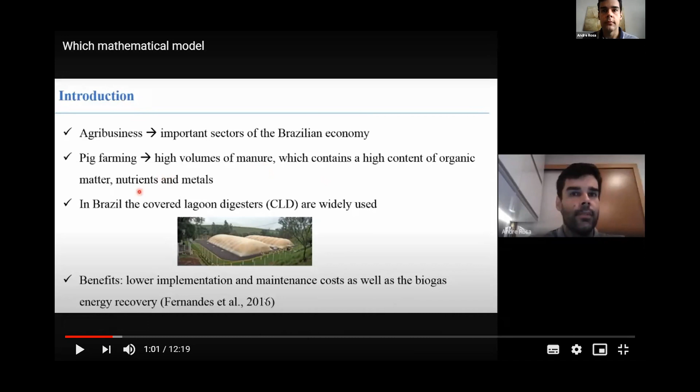Is it a video or presentation? I think that's a presentation, right? Mr. Rosa, I think there is no sound. No sound? Yes, there is no sound. Because yesterday I did a test with the Congress and everything was okay. You need to switch on your computer speaker. Or maybe you can present yourself. Just a minute. Is it possible to hear? If it is possible, you can speak about the presentation if you want. It's impossible to hear. If it is okay, you can share the information yourself. Okay, I'll share the presentation. Just a minute.

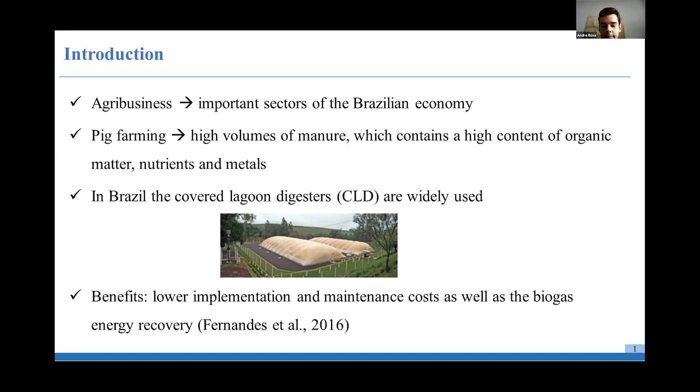We can try to estimate the biogas production in the system using mathematical models. But there is an absence of validation for full-scale plants in specific conditions, such as climate and digester design. We have national and international methodologies to estimate biogas production: Chen, mass balance, CETESB, a national methodology, and the Intergovernmental Panel on Climate Change methodology. The models require adjusted input data, and studies for model validation are scarce, especially for full-scale plants in warm regions such as Brazil.

Mathematical models for biogas production can help in the decision-making process and the improvement of sustainable energy in pig farms. This study aimed at evaluating which mathematical model best fits the methane production in pig farms operated by covered lagoon digesters. Here we have a full shot of the system.

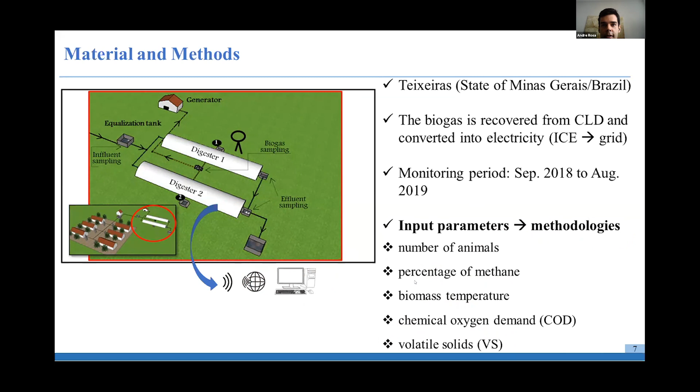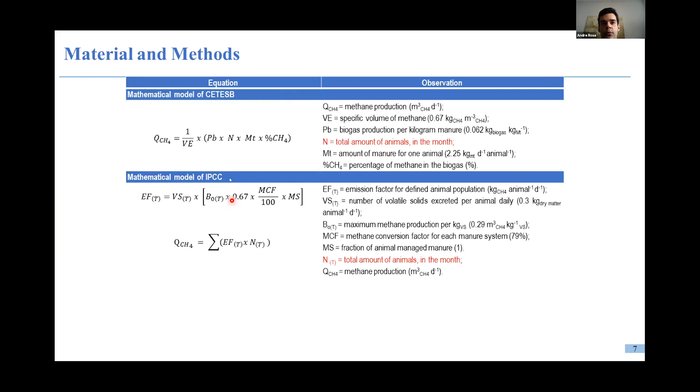The input parameters from the methodologies we compared were number of animals, percentage of methane, biomass temperature collected by the sensors, chemical oxygen demand, and volatile solids. Here you have the equations: the Chen mathematical model with the input data in red, mass balance, CETESB, and IPCC, where the main input data is the total number of animals. In these methodologies, we don't consider the characteristics of the materials, and when we do, it is with theoretical values.

The measurements of biogas composition were performed using a gas analyzer. Manure campaigns were carried out on a weekly basis, following the standard methods, and the manure flow was estimated using the water consumption and a coefficient of 65% of conversion from water to manure. The actual methane production, that is the reference, the value that we use to compare the methodologies, was monitored during this period.

And here is how we calculate the actual methane production. In this case, we used the electricity production and at the end, the methane production in the system. And the P actual, the actual production, and the mathematical models were compared by using t-test for a significance level of 5%.

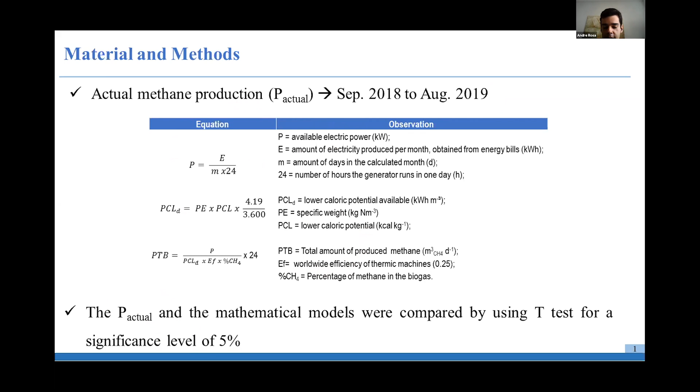Here are the main results of the research. The monthly average of animals and effluent flow. Here, the number of animals, the variation, and the effluent flow with an average of animals.

Okay? Yeah, okay. Okay, go ahead.

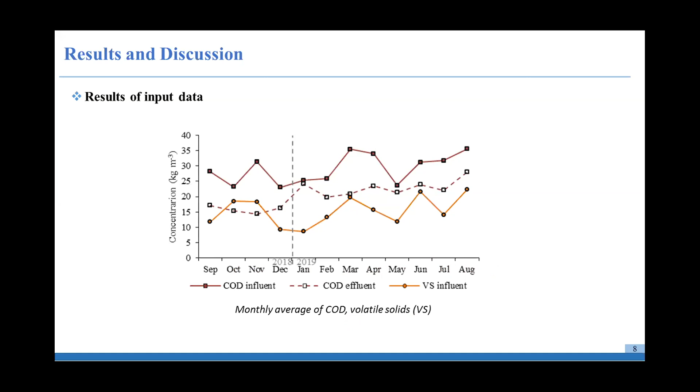Okay. Around 11,000 animals with an effluent flow of 102.3 cubic meters per day. Some results of monthly average of COD, volatile solids, with the variation through this period, with the concentration. And the methane production, monthly average of percentage of methane in biogas and internal temperature.

Here the percentage of methane ranged from 43.6 to 81.9%. And the biomass temperature inside the CLD varied from 20.1 degrees to 26.8 degrees.

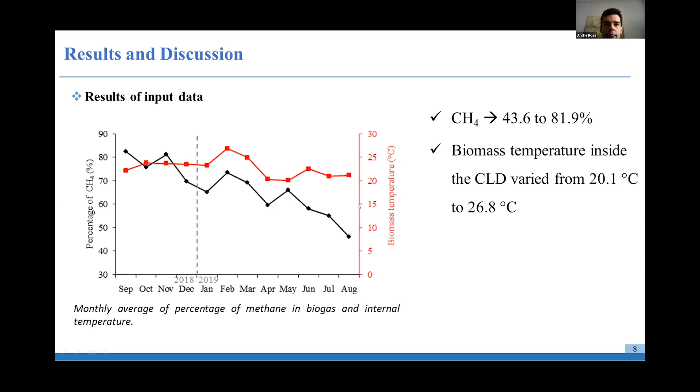About mass balance, we obtained an unsatisfactory performance of the mass balance model, and this could be associated with the flow rate variation, the COD variation, and methane losses dissolved in the effluent that were not taken into account in the original model.

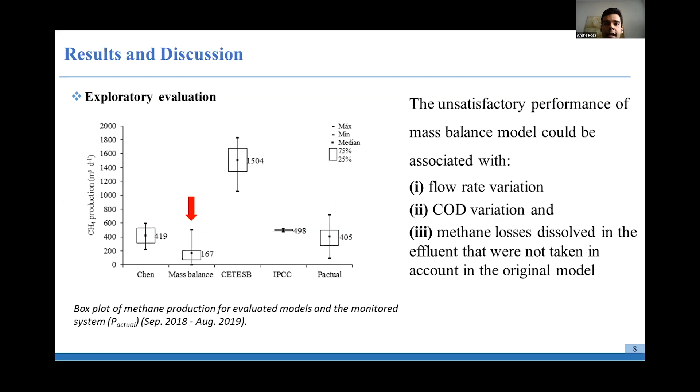About CETESB, the model presented a discrepant result. It considers as input data the number of animals and some theoretical data. In this case, the unique input data is the number of animals, and the other values are theoretical, and it does not consider the main variables reported in the literature for biogas production.

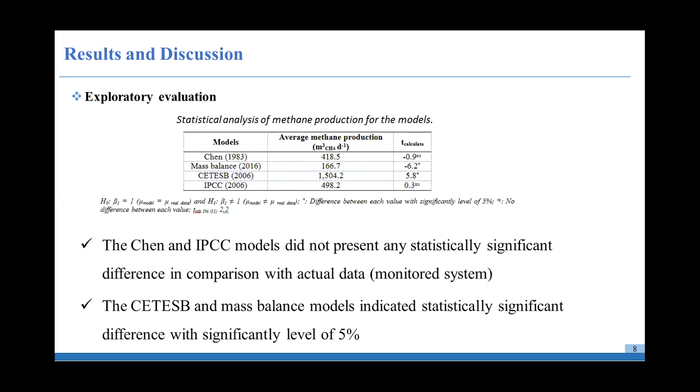On the other hand, the CETESB and mass balance models indicated statistically significant difference with a significance level of 5%. So we need, for example, to try to adjust or to propose some alternative methodology to improve these results.

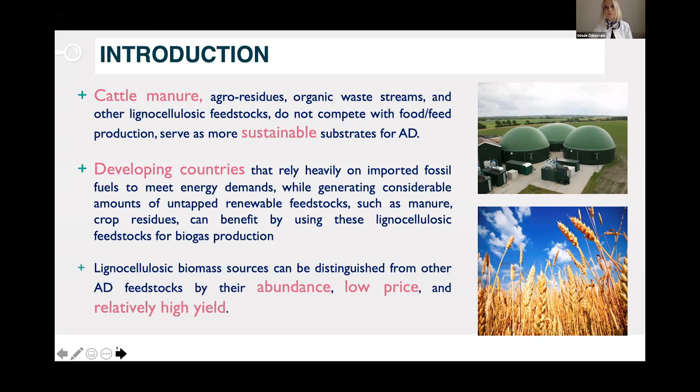In developing countries, we heavily rely on fossil fuels from abroad. On the other hand, we have so much abundant lignocellulosic feedstock that we can use for biogas production. We would like to use lignocellulosic feedstock for anaerobic digestion because of its abundance, low price, and relatively high methane yields compared to other feedstocks. But during anaerobic digestion of lignocellulose-rich feedstocks, we have a problem with the hydrolysis step because of their complex structures.

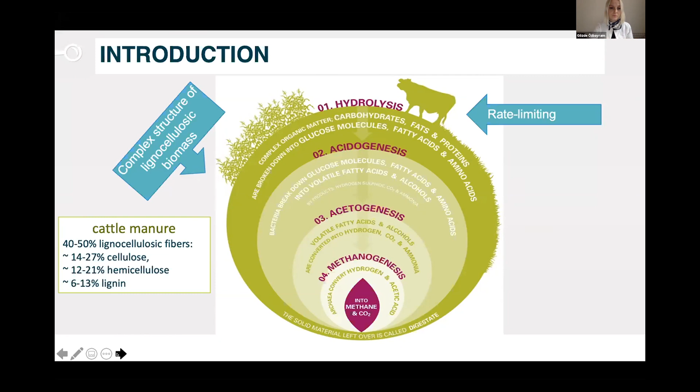Let's have a look at manure. Almost 50% of animal manure is composed of lignocellulosic fibers like cellulose, hemicellulose, and lignin, whose complex structure we must deal with. Anaerobic digestion of animal manure is a sustainable solution: on one hand renewable energy production, on the other hand waste management. The 4 steps of the anaerobic process need to be in balance, and any inhibition at any step can affect biogas efficiency at the end of the process.

Nature is always an inspiration for engineers and scientists, and ruminants can deal with lignocellulosic feedstocks very well. They have unique, sophisticated digestive systems that can metabolize lignocellulosic components easily. In the literature, rumen fluid is directly used as inoculum in anaerobic plants, but sustaining enough inoculum from rumen fluid is not really possible.

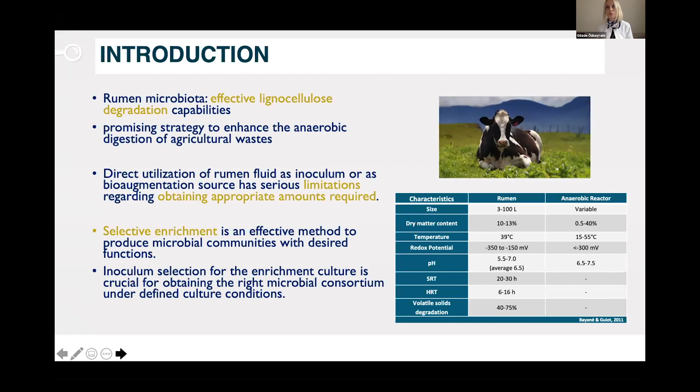Then we can consider selective enrichment. Ruminants have cellulolytic bacteria in the rumen fluid, and the anaerobic reactor and rumen share similarities like temperature, pH, and other components. We thought selective enrichment can be a strategy to produce more effective inocula for anaerobic digestion systems. Our motivation came from previous studies: in batch experiments, bioaugmentation with enriched culture from rumen fluid was an effective solution for digesters treating lignocellulose-rich biomass.

The aim of this study is to compare co-inoculation strategies in semi-continuous digesters in two-phase and single-phase systems, and to show the dynamics of representatives of cellulolytic bacteria in the systems periodically. For this purpose, we collaborated with Istanbul University Veterinary Faculty and took manure samples and rumen fluid from non-medicated healthy Jersey cows.

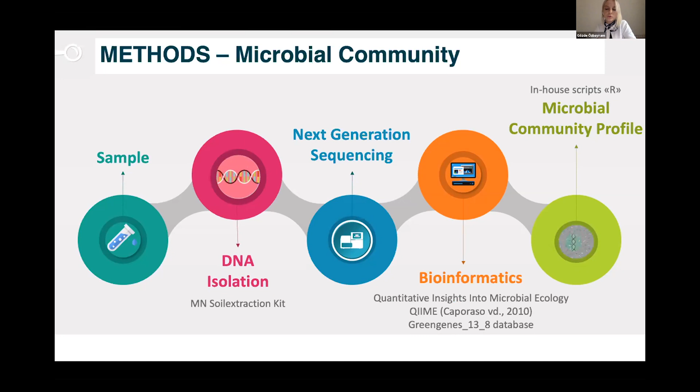And we checked the microbial community structures in the rumen fluid, enrichment culture, manure, and also in the standard inoculum. That's why we used next generation sequencing techniques. And after that, we analyzed the data with our in-house scripts for the bioinformatic analysis, to make the data meaningful. And we also used RStudio to compare the microbial community profiles in our samples.

And we tracked the cellulolytic bacteria with qPCR. We isolated DNA and then we performed qPCR for 3 representatives of the cellulolytic bacteria, which are commonly mentioned in the literature. And of course, we used RStudio for preparing the RDA graphs to make the data more meaningful.

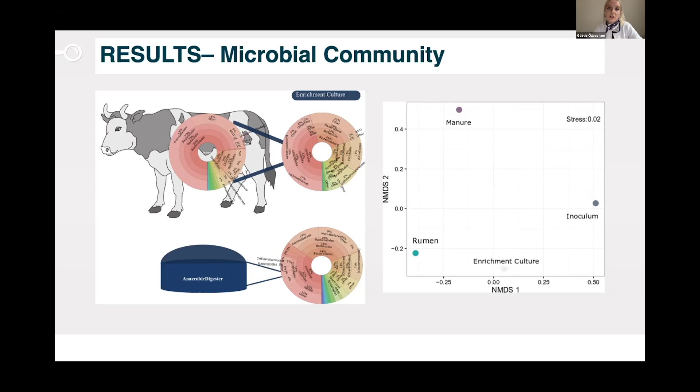And here we compare the communities with the NMDS plot. As you can see here, the rumen fluid microbial community is quite similar to the enrichment culture, but a bit different. But it is significantly different from the manure enrichment's microbial community, and it also differs from the inoculum. So it has a unique structure in terms of microbial community.

And when I continue with the biogas production results, I have to mention that we just made the inoculation at the beginning of the study, and we didn't repeat the inoculation during the operation period. That's why we had better biogas production in the first 15 to 20 days of the operation period. And then after a while, as you can see here, the biogas production stabilized. At the end of the study, we had higher production in the two-phase system, but compared to the beginning of the study, it's relatively low.

And here you can see the methane yield that we calculated for the entire study. As you can see here, in the two-phase system we had a higher methane component in the biogas, and I can say that we had higher methane yields in the two-phase system, which is in line with previous studies in the literature, regardless of the inoculation strategy. I have to mention that.

And in the two-phase system, the volatile fatty acid production reached around 1,500 milligrams per liter, but there was no accumulation. It is consumed immediately after we fed it to the methanogenic reactors.

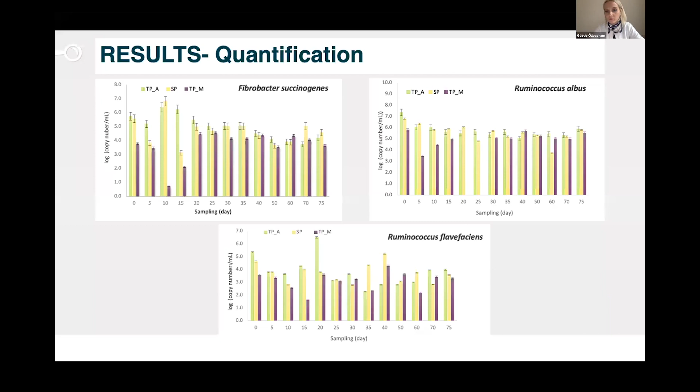And as a conclusion, our results show that the co-inoculation strategies with the enrichment culture and the rumen fluid gave higher biogas production in the first SRT in two-phase anaerobic digesters. The introduction of these specific bacteria resulted in high activity in acidogenic digesters. But in the end, the methane and biogas production trends stabilized after a while. It can be concluded that we can use a repeated augmentation strategy, a repeated inoculation strategy, to have higher biogas yields in further studies with this perspective.

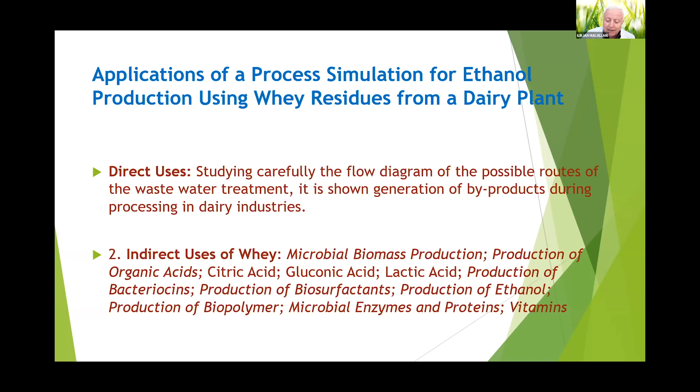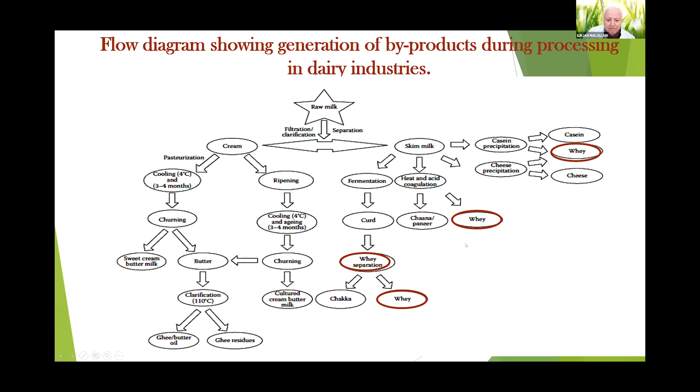As most people in the conference hall may know, I'll first cover the way of treating milk and the paths to reaching different products on the market. We are focusing on three points: where whey comes from heat coagulation, where whey separation through microfiltration or nanofiltration gives a liquid that must be treated, and from casein precipitation we also get a liquid. In a third case, from these three sources we get a liquid with different types of composition.

There is one way that people worldwide tend to focus on in the industry: first to profit from protein, which is most important for human health, delivering it to market as liquid or powder. But we'll also look at data from international experience. During removal of milk casein during cheese making, we get a lot of compounds that are really interesting for our study.

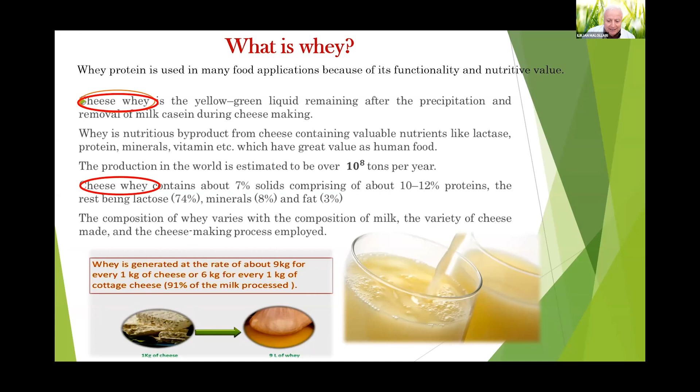It's generated that 9 kilograms of cheese whey result for every kilogram of cheese produced. This is important for others to know regarding nutrition value. There are whey-based beverages on the market, colorful packages delivering other compounds from this residue, but we are focusing on indirect uses of whey for the production of ethanol, bioethanol.

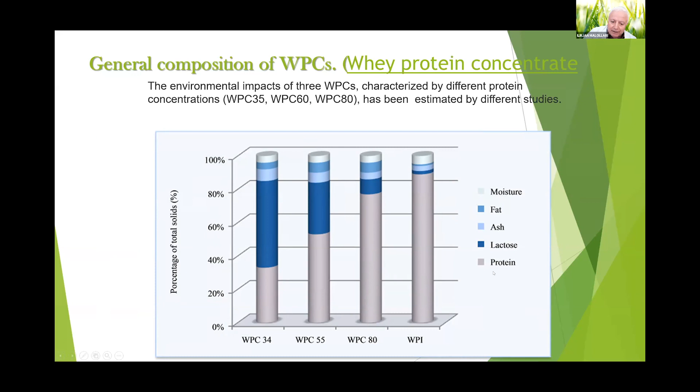I've already mentioned these usages, but we will focus on that. The residue of cheese and casein production contains a lot of compounds, minerals, and in the ashes, inorganic compounds. It's characterized by different protein concentrations - 35%, 60%, and 80%. Studies have shown there's a lot of fat, lactose, and protein. Protein is really abundant in the market, and a lot of people use it for everyday life.

I'm going a little faster because we need to see the results of our simulation. During food processing, the whey - cheese whey, milk whey as others call it - undergoes many processes, going from concentration by evaporation or reverse osmosis, then drying, becoming powder, producing a product that goes directly to market.

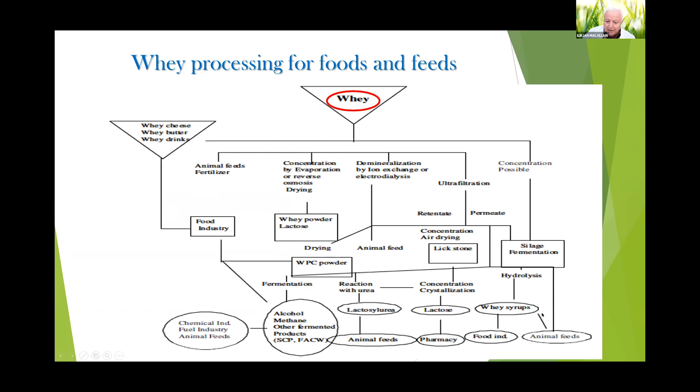But there are also other kinds of concentration and filtration, ultrafiltration, which lead to two different products with different outcomes after final treatment - going to a pharmaceutical product, to the food industry as a syrup, and then to animal feeds.

If we had more time to explain details, there's a lot of data to share with colleagues present online at the conference. But our path goes from this way to separation, and then the separation produces metabolites.

One part is biomass which goes directly to cell protein, also used for biodigestion, accompanied by lactic acid, B12 vitamins, and penicillin. The alcohol portion, which makes up the majority of the process, goes into ethanol or ethyl alcohol.

There is a need for Saccharomyces cerevisiae yeast in order to profit from this process. So the main pathway goes from the whey, then we make some concentration, then hydrolysis, then we get the product ready to be fermented.

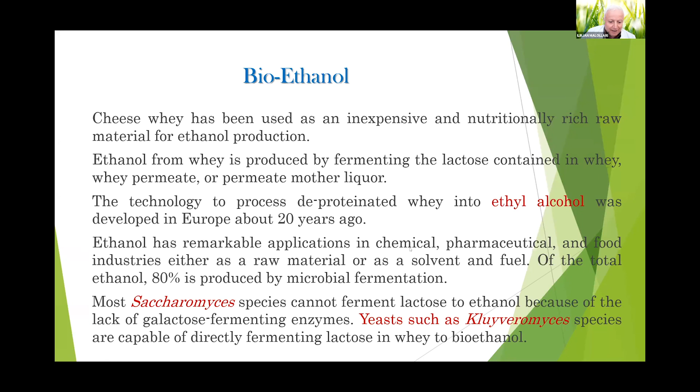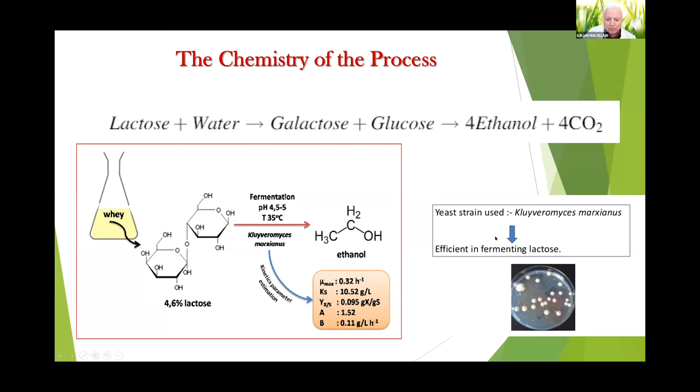I told at the beginning that I am not so good at keeping time, but I'm going a little bit through some chemistry. We go into Kluyveromyces marxianus, another strain of yeast we use, better than Saccharomyces cerevisiae, to produce ethanol as a biofuel.

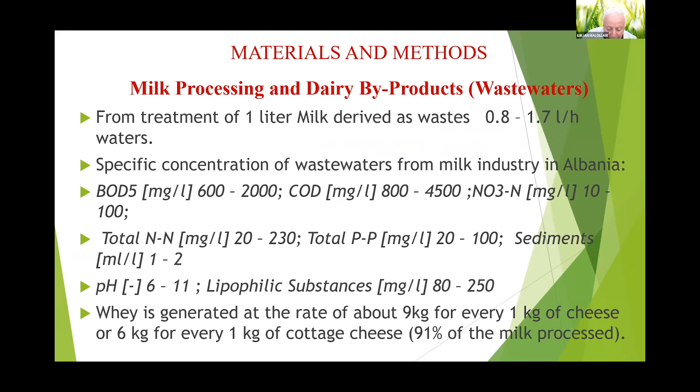We are going to see the possibility of simulating this process, coming from whey to ultrafiltration, directly to ethanol after dehydration. We have already reproduced this process entirely in our lab, producing and characterizing the ethanol. We have made all the material balances, characterized the liquids coming from milk from the bigger milk industry in Albania, and used different experimental setups to characterize the cheese whey and casein whey before starting the process by experiment.

First, starting the experiment through biological treatment in order to make hydrolysis, then simulation. The simulation means mass balance through the computer, then energy balances.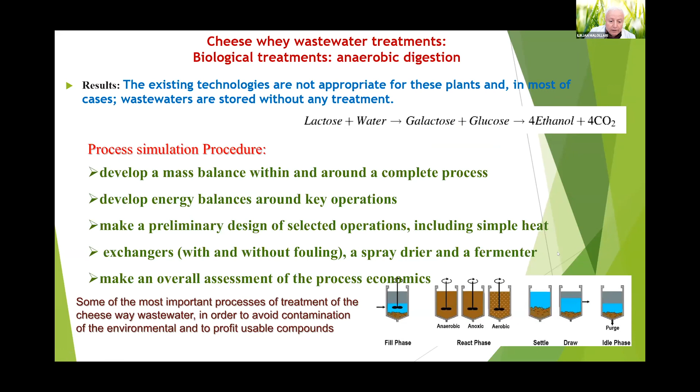First of all, we have to follow all the standard procedure. Then we have done exercises through the basic computer program, SuperPro Designer, and developed complete mass balance, energy balances, then preliminary design. At the end, after sizing the equipment and calculation, we have done a lot of reports calculating everything in detail according to the procedure.

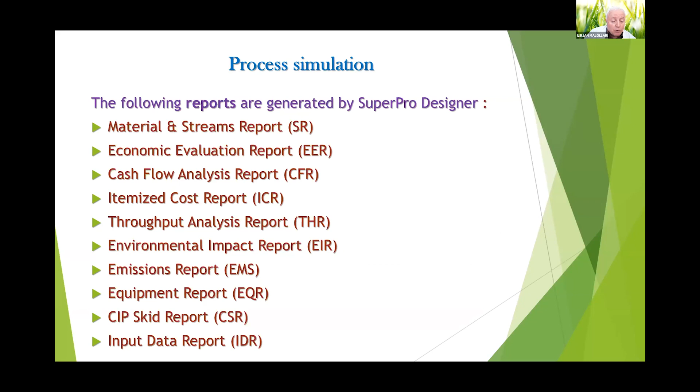Separating from that complex scheme, in SuperPro Designer we have a reactor for fermentation. Then after reverse osmosis, we get the liquids with a value that needs to be fermented, changing to sugar content. Then after fermentation, we make a centrifugation, then a distillation column in order to increase the concentration of the ethanol produced, and then we can store this ethanol.

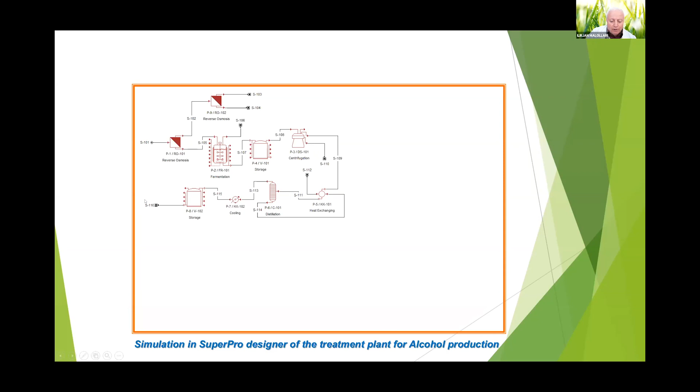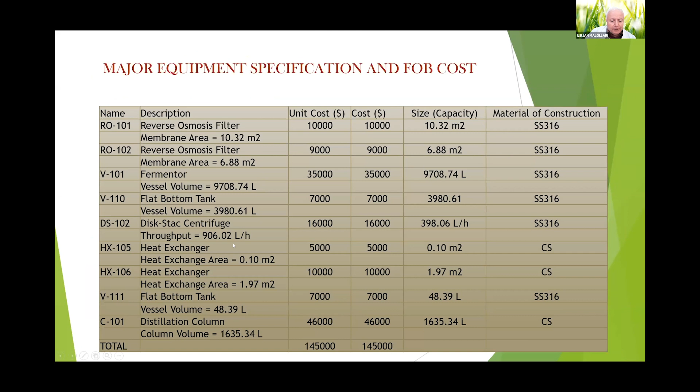There is some data now coming from the simulation, and you see the results: 17 liters of ethanol for 100 liters of whey, and some investment that needs to be done to secure suppliers of equipment for making it possible to produce the ethanol with the plant in reality, at industrial capacity. And then we have followed all the calculations coming from emission reports, from administration.

And then it is a kind of a preview of the future of our study, in order to bring into reality this project for producing bioethanol from cheese whey.

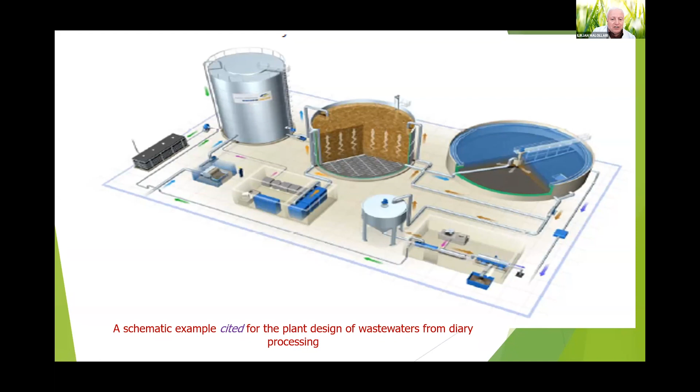And we have produced, you see, 0.002 metric tons per hour of 95% pure ethanol. First of all we produce 60%, and then concentrate through distillation and rectification up to that level.

So producing biofuel is a big direction for positive environmental impact. For this reason, bioethanol production offers an ideal alternative to whey valorization. Ethanol production is restricted to microorganisms, so we changed from Saccharomyces cerevisiae yeast to another yeast that is more productive and more promising.

In Albania this seems to be one of the interesting projects that needs to become reality for the economy, helped by the chemical engineers who have produced all this data. Thank you so much.

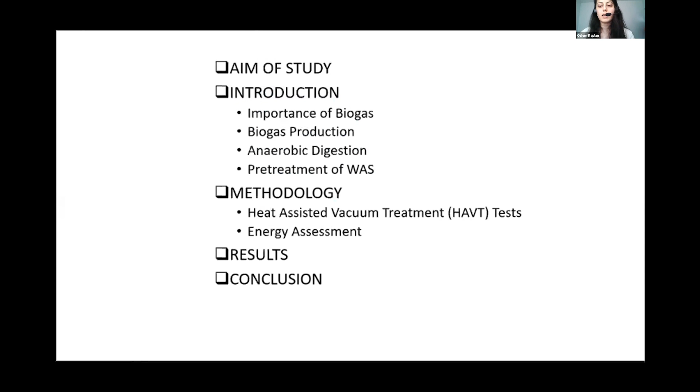Firstly, I will begin with the aim of our study. Then we will look at some underlying information about biogas, anaerobic digestion, and pretreatment methods. After the introduction, I will introduce you to our developed system, and finally we will evaluate the results and see the conclusion.

The first aim of the study was to make disintegration experiments in order to break up activated sludge flocs and explode the microorganisms. Here you can see the structure of activated sludge flocs. It consists of bacterial colonies, filamentous bacteria, EPS matrix, and particulate organics. Activated sludge flocs are broken up into their elements by disintegration methods.

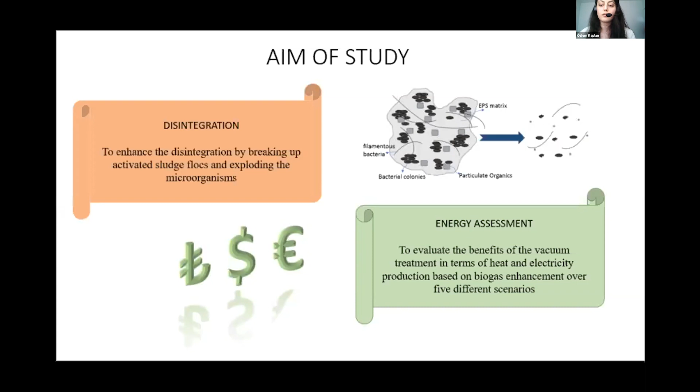The second aim of the study was to evaluate the benefits of the vacuum treatment in terms of heat and electricity production based on biogas enhancement over 5 different scenarios. It was very important for us because, as we all know, cost estimation is a big part of any technology in engineering.

Now let's look at the importance of biogas. Escalating energy consumption increases the demand for renewable energy sources. Therefore, we need alternative energy sources. In this sense, biogas is an important renewable energy source with a high calorific value. It has no greenhouse gas emissions and enables less usage of fossil fuels. Biogas is mainly composed of methane and carbon dioxide, and its calorific value increases with the increase of methane percent. So the improved biogas expression in the title means a high methane percent in biogas.

In biogas production, an anaerobic digester is used, and the digester can be fed with several waste materials having high organic content, such as manure, food waste, and wastewater treatment sludge. In our study, we dealt with waste-activated sludge, which is produced at a wastewater treatment plant. However, waste-activated sludge, especially obtained from extended aeration systems, has a very stable structure, which is hard to decompose biologically. Because of this reason, in extended aeration, a pretreatment may be applied to waste-activated sludge before anaerobic digestion.

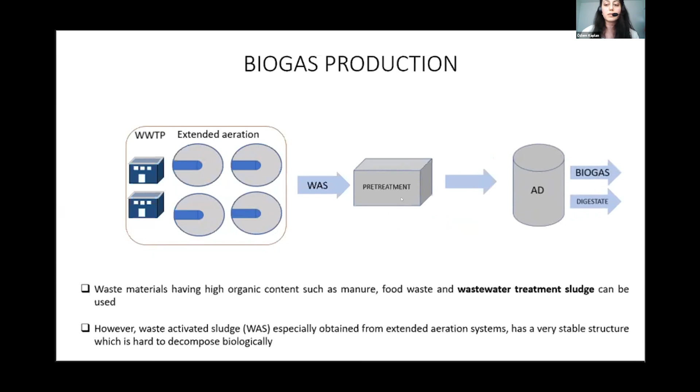Now let's see how the anaerobic digestion process occurs. The steps of anaerobic digestion are hydrolysis, acidogenesis, acetogenesis, and methanogenesis. Our interest was the hydrolysis step in this study. If we look at the hydrolysis step closely, we can say it is the breakdown of complex organics into soluble organic substances, which are smaller and can be easily decomposed by microorganisms. In anaerobic digestion of sludge having high sludge age, the rate-limiting stage is hydrolysis.

In order to increase hydrolysis rate and enhance anaerobic digestion, a pretreatment method can be used. Sludge pretreatment technologies are used to disintegrate the flocs and microorganisms, thus increasing the solubility, dewaterability, and biodegradability of sludge by changing its physical, chemical, and/or biological properties. They can be mechanical, chemical, biological, or thermal. Our developed system, the HAVT process, may be called a combination of mechanical and thermal pretreatment methods.

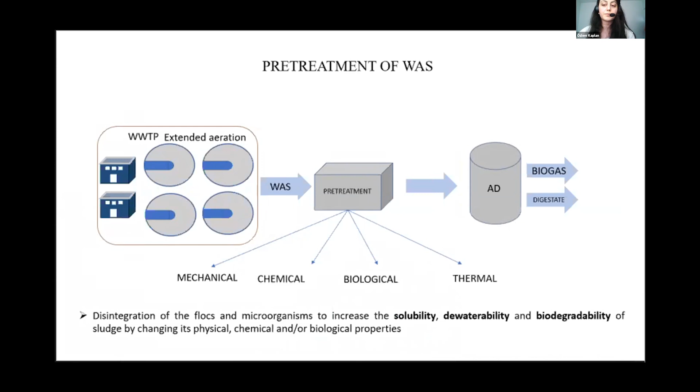Now let's see how we performed the experiments. We used thickened sludge and digestate, which have a total solid amount of 4%. The experiments were done in an airtight bottle connected to a vacuum pump. The bottle was mixed with a magnetic stirrer during the experiments to maintain homogeneous temperature and TS content. With the help of the vacuum pump, pressure in the bottle was kept under atmospheric pressure. At 59 degrees, the sludge started to boil at a pressure of 18 kilopascals.

In this video, we can see a part of the experiments. During vacuum application, the pressure is kept under atmospheric pressure and molecules start to move. Then sludge boils when the molecules have enough thermal energy to overcome the intermolecular attractive forces that hold them together, thereby forming vapor bubbles within the sludge. This enables the disintegration of flocs and cell rupture.

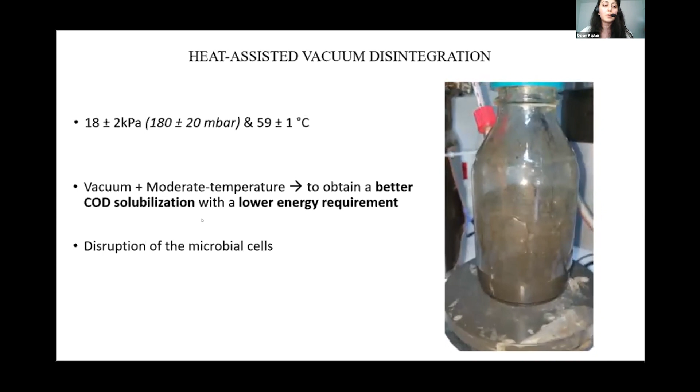I can explain the difference of our study from the existing studies in the literature this way. We have used the synergistic effects of vacuum and moderate temperature thermal treatment to obtain a better COD solubilization with a lower energy requirement.

In these graphs, we can see the results of experiments. Soluble COD increases with the HAVT process for both thickened waste activated sludge and digestate. The increase in soluble COD value is 327% for WAS and 53% for digestate.

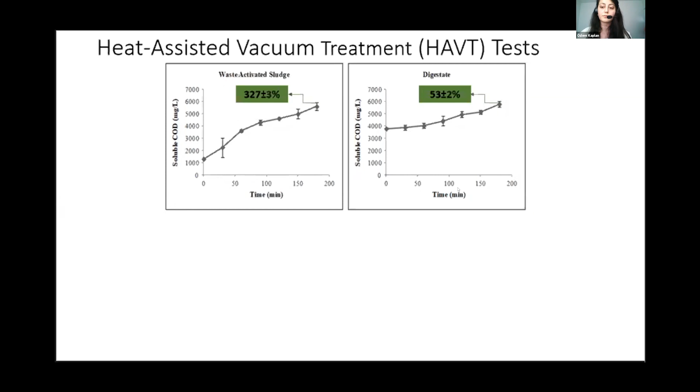The reason for the significant increase in soluble COD values is the breakage of floc structures in the sludge, disruption of microbial cells, release of cell content, and conversion of particulate organics to soluble compounds. Therefore, the anaerobic digestion process will be stimulated, so both biodegradability of the sludge and methane yield will be higher compared to the untreated sludge samples. Moreover, the required time for hydrolysis will be less and the construction cost of anaerobic digesters will decrease.

In the second part of the study, an energy analysis was performed for different digestion scenarios in order to evaluate the performance of HAVT on the digestion process, heat and electricity production. These scenarios were built based on total solid loads for a full-scale application, and only digestate characteristics were used in estimations.

Sludge flow scheme of the designed anaerobic digestion system coupled with HAVT units can be seen in this figure. In this system, the digestate withdrawn from the digester is conveyed to the vacuum vessel after being heated up to 59 degrees with a heat exchanger. After vacuuming at 18 kilopascal and 59 degrees for 3 hours, the digestate is recycled back to the digester.

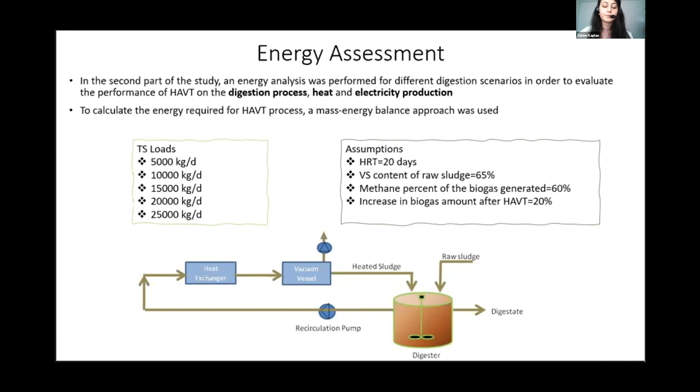To calculate the energy required for HAVT process, a mass energy balance approach was used. The assumptions of HRT, VS content of raw sludge, methane percent of biogas, and increase in biogas amount after the HAVT are listed here. The energy requirements and biogas-based electricity and heat generation potential of the developed system were calculated in order to evaluate the energy balance of HAVT process. Theoretical biogas and methane production values were calculated based on assumed organic content of the sludge.

A combined heat and power system was integrated into the scenarios. This cogeneration provides electrical energy and useful heat by combusting the biogas. Both the heat and electricity production efficiencies of the cogeneration system were chosen as 40% each, and the rest of the energy was assumed to be lost.

The generated heat is used for heating the vacuum vessel and the anaerobic digester by heat exchanger, and the generated electricity is used for the vacuum pump. The produced heat and electrical power are directly associated with the production of methane gas in anaerobic digestion and increase with soluble COD increment in feed sludge.

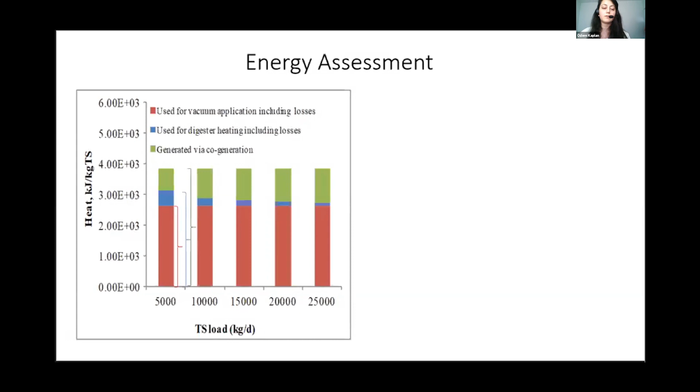In this graph, we can see the comparison of different scenarios. Red parts are the heat requirement for HAVT application. Blue parts are the heat requirement for digester heating, and the green parts are heat generated via cogeneration. The generated heat, the green part, was calculated by considering 20% increase in biogas as a result of HAVT pretreatment. Digester heating requirement drops with increasing TS load because the surface area to volume ratio decreases as the digester becomes larger. This figure also shows that the heat remaining after the HAVT increases with rising TS load.

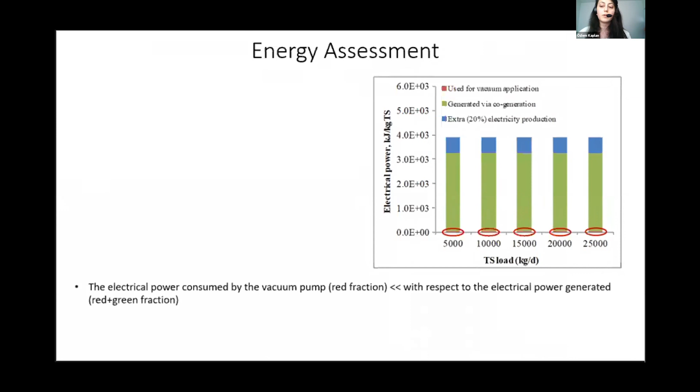This graph is also a comparison of scenarios. Here it is shown the electrical power generated via cogeneration, green parts, extra electricity production, the blue parts, and the power used for vacuuming, red parts. They are very small. Here, the electrical power consumed by the vacuum pump was estimated to be very low with respect to the electrical power generated.

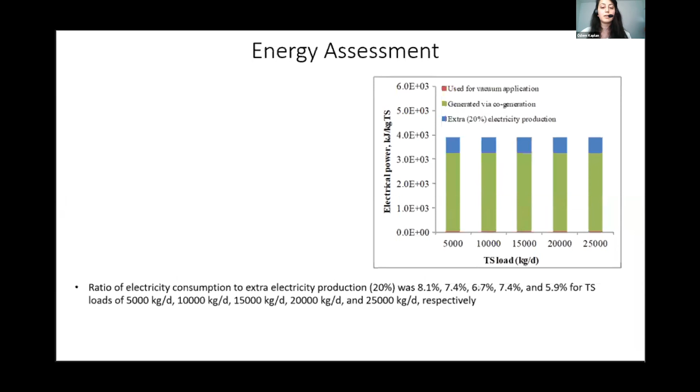Electrical energy obtained from the extra methane produced after the HAVT is high enough to compensate the energy required for vacuuming. Ratio of electricity consumption to extra electricity production never exceeds 10%, as you can see from these values. Finally, it was indicated that the heat required to keep the temperature at 59 degrees during the HAVT is less than the amount needed for digester heating. This is a very important point. The electrical energy required for vacuuming is significantly lower than the extra electricity generated.

Özlem, you have 3 minutes.

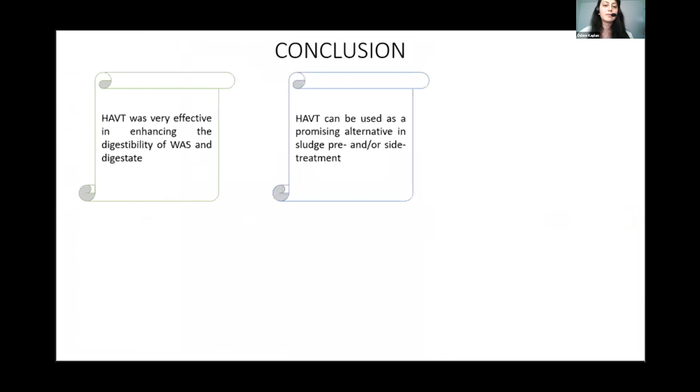Okay, conclusion part. As a conclusion, I can say that HAVT was very effective in enhancing the digestibility of WAS and digestate. HAVT can be used as a promising alternative in sludge pre- and/or side-treatment. The anaerobic digesters can be operated more efficiently and may produce more energy per unit volume of sludge to be digested. 68% of the heat generated via cogeneration is adequate for keeping the temperature at 59 degrees for 3 hours during HAVT. Improvement in biogas amount and methane content is very important in constructing energy self-sufficient or energy positive sewage treatment processes. Thank you for listening.

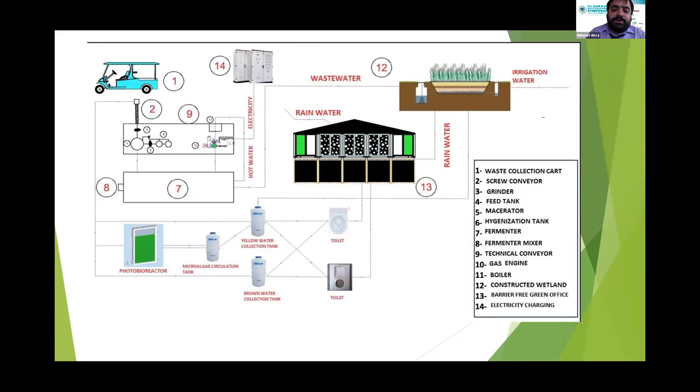Sorry. The dining hall of Istanbul Technical University has a capacity of 12,000 people. We fed the fermenter with the leftovers up to this point, like celery, leaf and grass, potatoes, carrots, and other vegetables. And we had to stop feeding due to the pandemic because the dining hall stopped operating in the pandemic period, so we had to stop operating the plant.

Small-scale biogas plants are actually common in many parts of the world, including India, Southeast Asia, Europe, as well as in America. In India and Southeast Asia, the biogas produced is usually used as cooking gas in the kitchens. But in Europe, electricity and heat is also produced. And in Northern America, even farms which have less than 100 cattle may have small-scale compact biogas plants to produce energy, electricity and heat. Of course, several problems with operating small-scale compact biogas plants are reported in the literature.

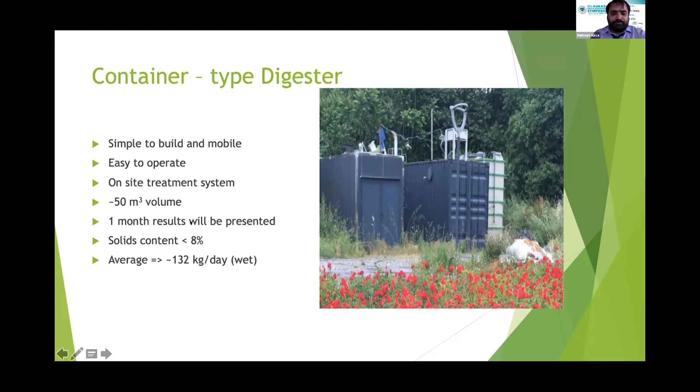We tried to keep the solids content in the reactor below 8%. Below 8%, it can be considered a wet type digester. We operated in mesophilic conditions near 38 degrees Celsius, and on average for 1 month we fed 132 kilograms of food waste per day. This is not dry weight, by the way, this is the wet weight. We have a CHP unit, as you can see here. It has 35 kilowatt installed capacity, and we achieved 15 kilowatt hours net energy production in the 1 month of operation of the plant.

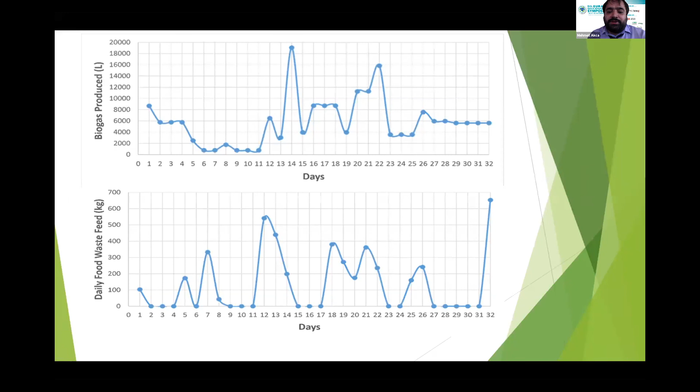In these graphs, you can see the amount of biogas production per day and the daily food waste. We couldn't feed the digester every day in 1 month due to several inconveniences within the university. Sometimes the collection cars were not available. Sometimes the wastes were already disposed. And as you see, the biogas production seems consistent with the feeding, and the digester is able to produce biogas. We have achieved 672.5 liters biogas production per kilogram VS fed to the reactor. Continuous biogas production can be achieved with continuous loading.

We're actually hoping to start continuously operating the plant, but right now it's not possible. The dining hall is operating, but they're serving the food in bags, and people eat it and dispose of it wherever they want. We cannot collect food waste at the moment. As I said, we could achieve 15 kilowatt hours electricity production. And there are electric cars on the campus. The produced electricity will be used by these cars. There are charging stations on the campus, and we're not going to give the electricity to a network. We're going to give it to the charging station for electric cars.

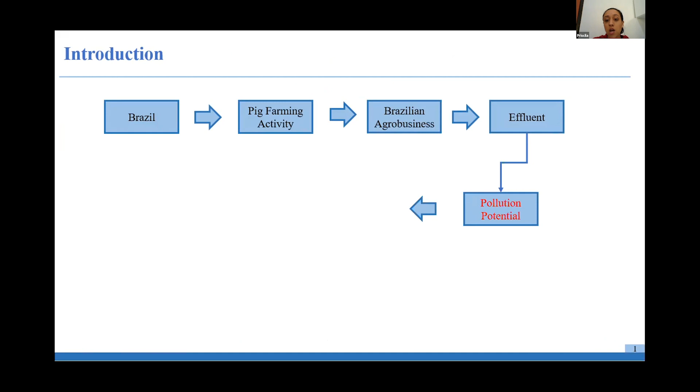In Brazil, pig farming is one of the most important activities in Brazilian agribusiness. However, this activity generates effluent with a high pollution potential, so treatment is essential. One of the alternatives for treating these effluents is anaerobic reactors, and in Brazil, covered lagoon biodigesters stand out as the most important anaerobic reactors used to treat the effluent generated by pig farms.

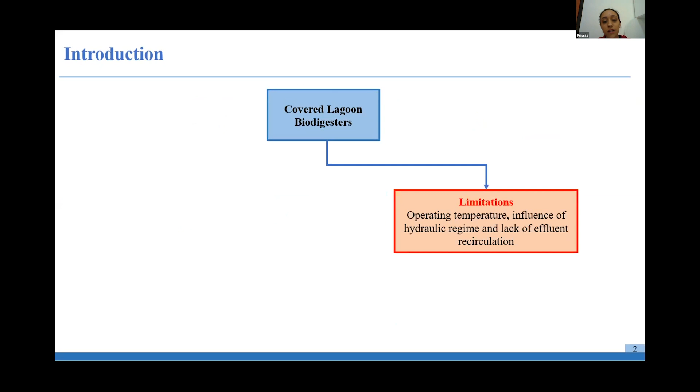Covered lagoon biodigesters have some limitations, such as the operating temperature, the influence of the hydraulic regime, and the lack of effluent recirculation. However, there are some advantages as well, such as low costs, low energy demand, low sludge generation, easy operation, and biogas production. And the biogas can be converted into thermal and electric energy.

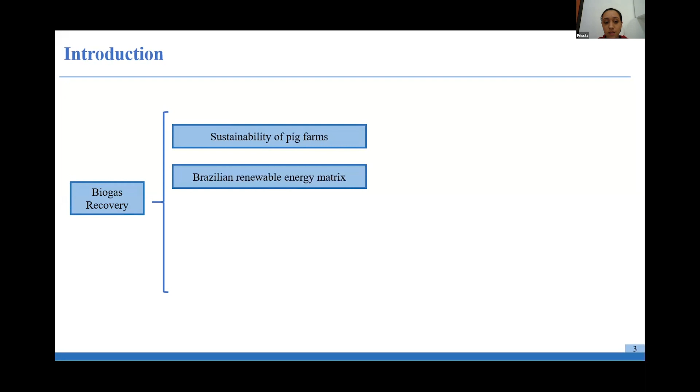Biogas recovery has other important uses as well: it can increase the sustainability of pig farms, increase Brazilian renewable energy matrix, reduce CO2 emissions, and also help reach the goals of the Paris Agreement.

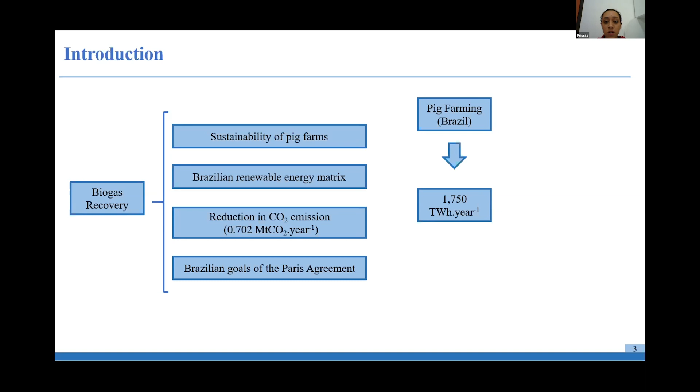Some studies say that pig farming in Brazil has the potential to generate 1,750 terawatt hours per year of electricity from biogas recovery. However, this potential is largely unused in Brazil. For example, in the state of Minas Gerais, only 34.8% of pig farms use the covered lagoon biodigester to treat their effluents, and of these, only a few generate energy from biogas recovery.

The low use of biogas energy potential may be due to the lack of regulation and incentive policies for the development of accessible and appropriate technologies in the Brazilian context. So we believe that monitoring and optimizing the anaerobic process, regarding constructive and operational improvements, can increase organic load removal and biogas production, and reduce greenhouse gas emissions.

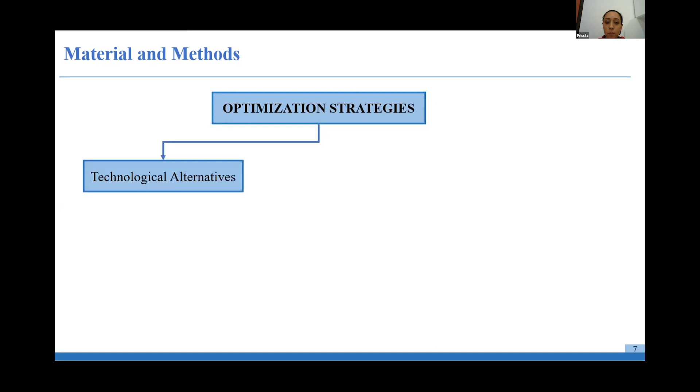This work aimed to present scenarios and alternatives associated with constructive and operational improvements of covered lagoon biodigesters, as well as integrating their byproducts recovery, in order to improve pig farm sustainability. The interventions came from scientific papers, technical equipment manuals, technical research, and consultation with professionals. We separated the optimization strategies into two parts: technology alternatives, including preliminary treatment, operation temperature, and effluent recirculation; and byproducts recovery, considering operation temperature and biogas energy recovery.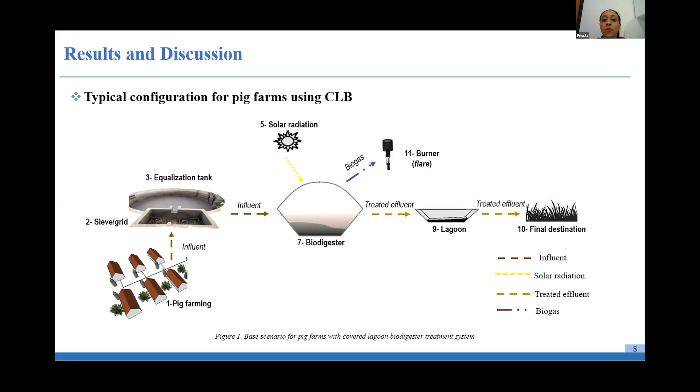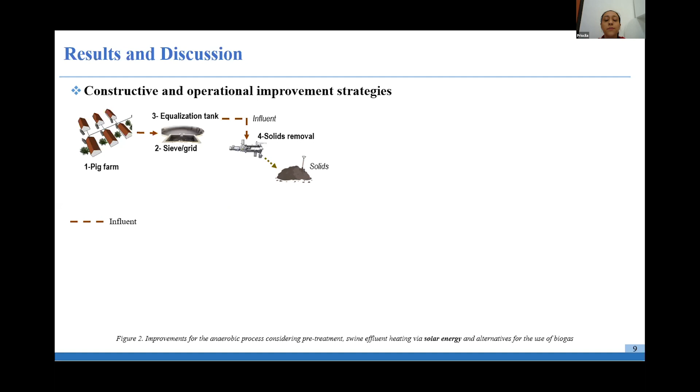Here we present some of the improvement strategies we considered. The influent comes from the pig farm and goes to the sieve, and the part not retained goes to the equalization tank. The first improvement is the use of pre-treatment, namely solids removal. After that, we have swine effluent heating via solar energy. Another one is the recirculation of the treated effluent.

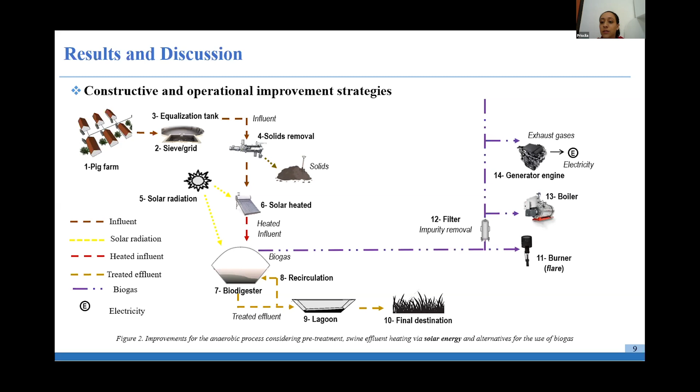And there are alternatives for the use of the biogas. Instead of going to the burner, the biogas can first pass through a filter to remove impurities, and then go to a boiler or to a generator engine to provide electricity, or be used as biomethane.

And here we have almost the same improvement strategy, but we change the heating of the swine effluent to a different form. So from the pig farm, we have the influent coming from the pig farm activity and then going to the sieve. The part that's not retained goes to the equalization tank, and then to the solids removal as the pre-treatment strategy. And then going to the biodigester, with the recirculation of the treated effluent coming from the biodigester.

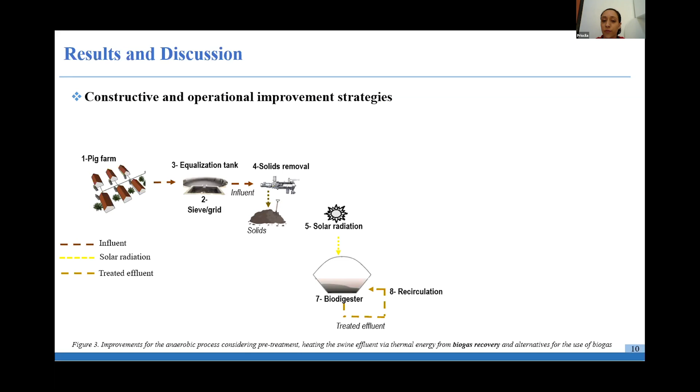The biogas, the alternatives for the use of the biogas. So we have the biogas going to a boiler or a generator engine. And in this case, we can use this biogas, becoming thermal energy. And then we can use this energy to heat the cold water that will be used to exchange the heat with the influent. And then we have a heated influent going to the biodigester. This heat exchange can occur outside the biodigester or inside the biodigester as well.

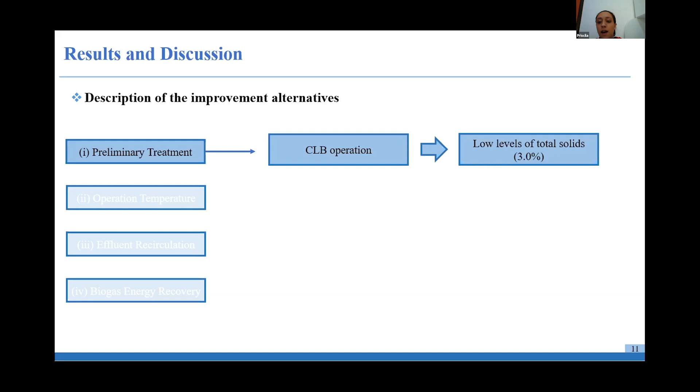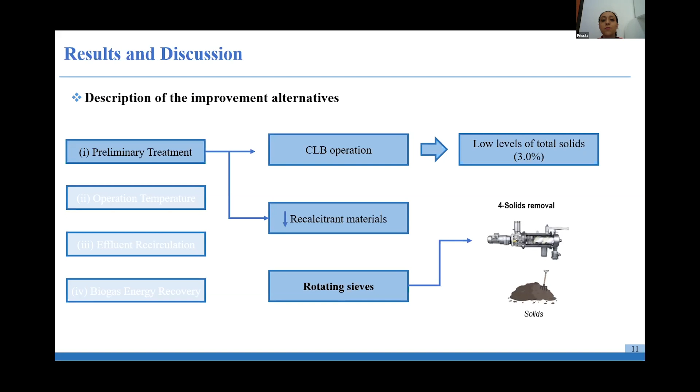I'm going to describe a little bit about the improved alternatives that we talked about. So about the preliminary treatment, that's very important to the covered lagoon biodigester operation, since this reactor operates with a low level of total solids, around 3%. And also the preliminary treatment decreases the recalcitrant materials, making the microbiological activity better, and then producing more biogas. And we have different methods for the preliminary treatment, but here we put the rotating sieves as an example that has been used a lot in the pig farms that have these improvement alternatives.

The operation temperature: the main heating source for the biodigester is the solar radiation on the top layer of the biodigester. So it's very important to choose dark colors for the dome of the biodigester, since this specific dome can absorb more solar radiation. And also, even in countries with a tropical climate such as Brazil, we still see that the covered lagoon biodigester operates at a temperature below the ideal for the anaerobic process. So the effluent heating stands as a good possibility to increase the heat inside the biodigester and increase the microbiological activity inside the reactor.

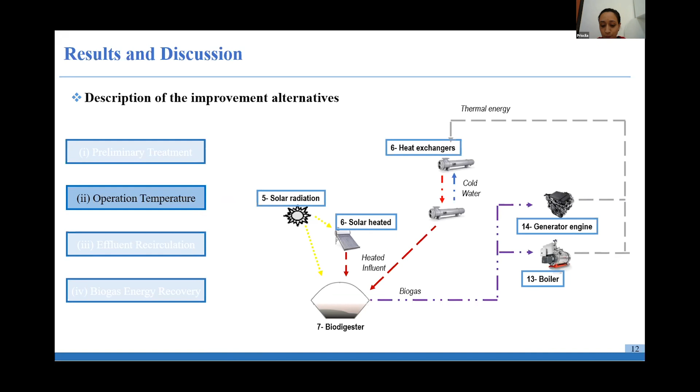About the effluent recirculation, this effluent recirculation increases the degradation of the organic matter since it increases the cell residence time, provides a greater contact between substrate and microorganisms, and standardizes the effluent temperature. However, this method can also accumulate ammonia and volatile acids and increase the viscosity of the effluent. So it's very important to monitor the treatment, even if we have this alternative or not, but if we have this alternative, it's very important to monitor it.

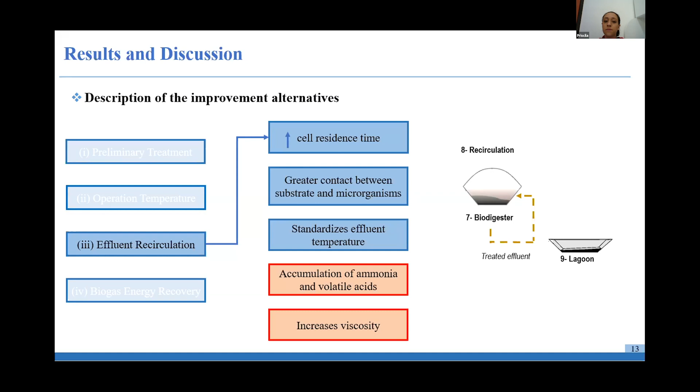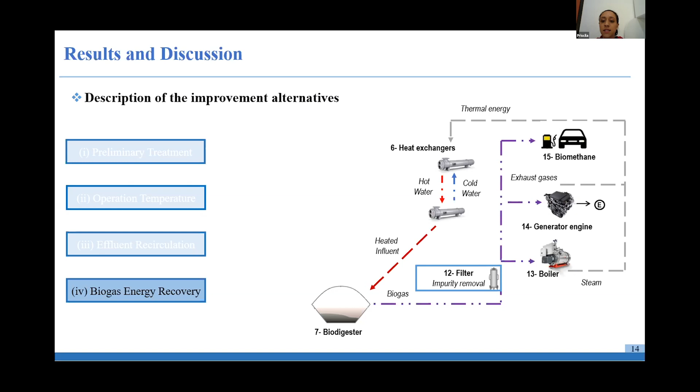The economic viability of the biogas recovery depends on local factors, and the investment in machines and the amount of biogas produced favor the large producers instead of the small producers for this alternative to be worth it. And the impact of biogas recovery depends on the pig effluent composition. So it's very important to do the life cycle analysis of the whole anaerobic process and also the biogas production to check the real feasibility to recover the biogas.

So as a conclusion, the covered lagoon biodigester is a simple and suitable alternative for pig waste treatment. The optimization of this system requires evaluations of some constructive and operational aspects. The use of strategies to improve the anaerobic digestion process in biodigesters promotes an increase in the treatment efficiency and in the biogas production. The biogas energy recovery is still not very widespread, which highlights the need to disseminate techniques and studies in order to improve the economic viability of biogas energy processes.

The creation of regulations and policies may incentivize the development of accessible and appropriate technologies for the Brazilian context. And the use of tools such as life cycle analysis can favor decision-making and comparing proposed alternatives.